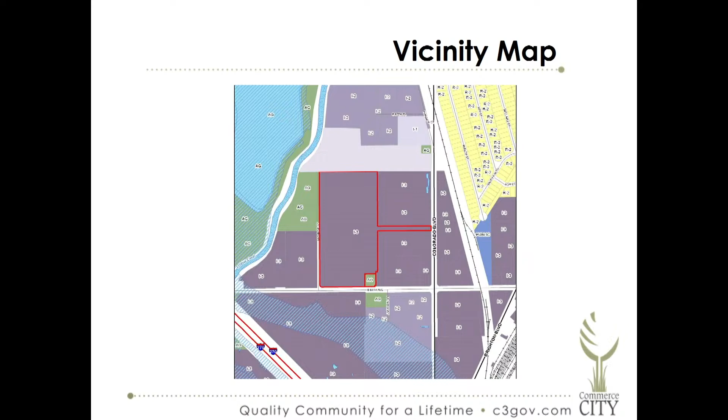So as stated, these are the requests. The current zoning is I3 with conditions and agricultural. The I3 with conditions on approximately 20 acres was zoned in 1991. The agricultural zoning on the .41 acres was from incorporation into the city. The proposed zoning for the entire property is I3. The future land use plan designates this area as general industrial.

These cases are being brought together because they are concurrent and dependent on each other, as we'll get into as we discuss the case. There is a concurrent development plan under review administratively that would need to follow these cases. The overall order is: the zone changes would have to be approved, then the consolidation plat would have to be approved, and only after that could the development plan be approved through the administrative review process. Only then would any improvements or site work be able to begin at the end of the full process.

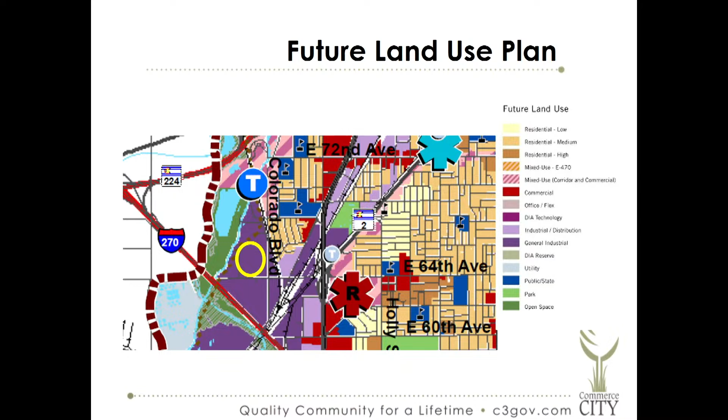This is a currently developed, or previously developed, site, as we'll get into with the conditions here. Those conditions would need to be removed for essentially any site or any use coming forward due to the nature of them.

This is a portion of the site that was a former landfill, and there are documents in the staff report that go into that in more detail. The applicant worked through an environmental assessment and discussion with Tri-County Health Department, and ultimately there were no objections to the rezone as presented. The environmental planner for the city of Commerce City reviewed all the documents and concurred with the ultimate assessment of the environmental issues.

The proposed overall use, under these cases tonight, would require rezoning all of this area, the subject parcel, to I3 and consolidating it into one lot, and that's the request before the commission tonight. Following that, there are 4 lease sites and on-site improvements. All of that is associated with the development plan, which would only be possible if those zone changes and the consolidation plat are approved, recommended for approval, and then ultimately approved by city council.

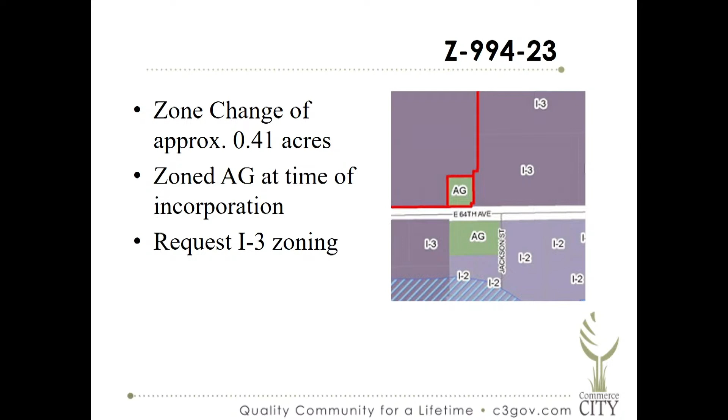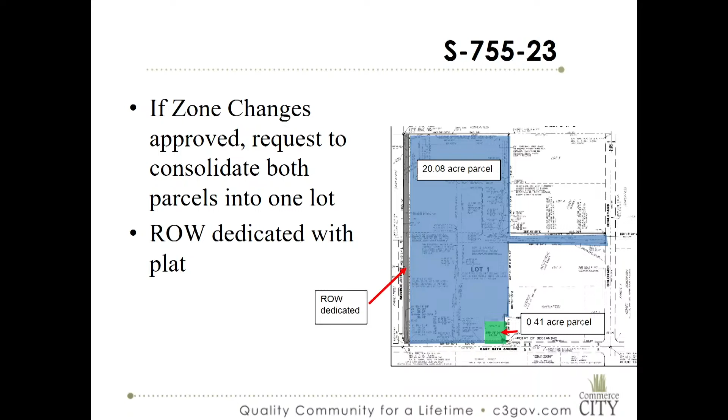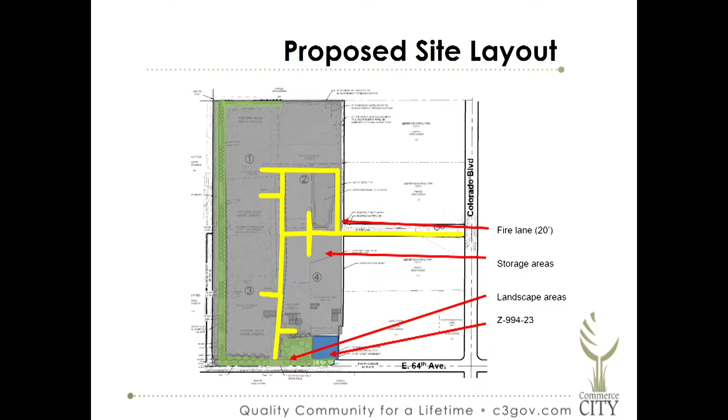The development review team analysis was that based on the request and the approval criteria, the rezoning and subdivision plats are justified, allowing development of a property in an industrial area. The proposed uses and concurrent applications are consistent with the request for I3 zoning. Ultimately, there were no agency review comments remaining or objections to the zone change or subdivision plat applications.

These are referencing the approval criteria for the zone changes in LDC section 2132.32.5, and for a consolidation plat in 2132.43.3. With these applications, DRT found that all of the approval criteria would be met.

At the March 2nd, 2023 DRT meeting, there was a recommendation to recommend approval to this body.

Staff did receive one phone call from a member of the public with some concerns and requested additional information. I believe they are here to speak tonight as well.

With that, staff will conclude our presentation. The applicant is present with a presentation as well.

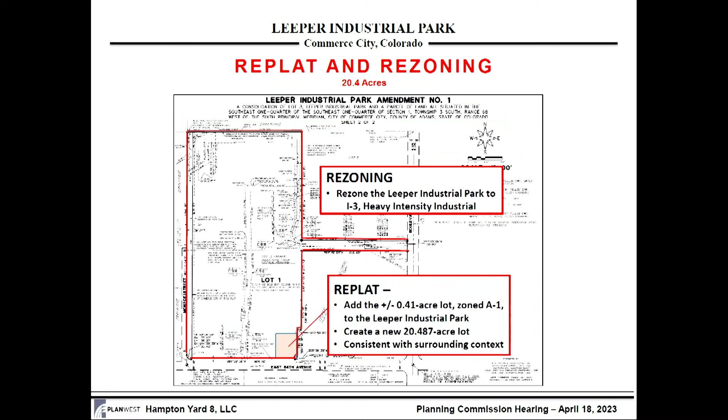I'm going to skip through this because Stacy talked about the rezoning and platting, I don't need to do that. Just to give you a little bit of background from when we started this.

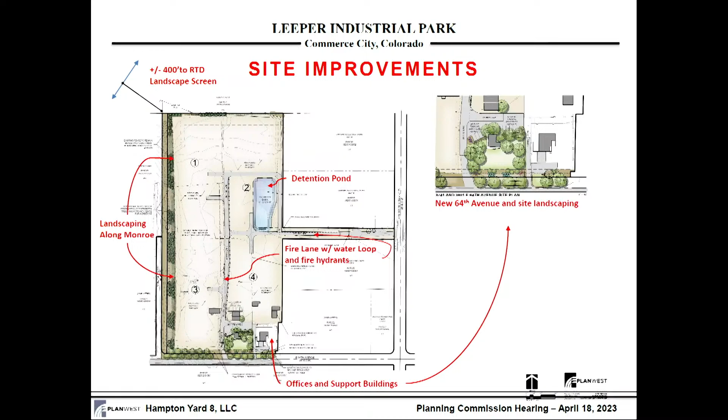So with that, I'm going to turn this over to Tucker, part of Hampton, and let them talk about who they are and what their intentions are.

Great. Thanks, David.

Hello, my name is Tucker Robinson, and I'm here representing Hampton Partners, the parent company to Hampton Yard 8 LLC. We've been in business for over 40 years and have experience in all types of real estate investment, but I wanted to highlight in particular another property in Commerce City that we purchased in September of 2020 off of 104th Avenue.

We repaved the parking lot for the office buildings. We put new roofs on all of the buildings on site. We even roofed the wash bay per EPA requirement. We added new landscaping to the frontage. We installed a new privacy fence — all sufficient to say that we care how our property looks, we care how our property operates, and we want to go above and beyond to be the shining example of what industrial property should be in Commerce City, that I think the movement has been towards in recent years.

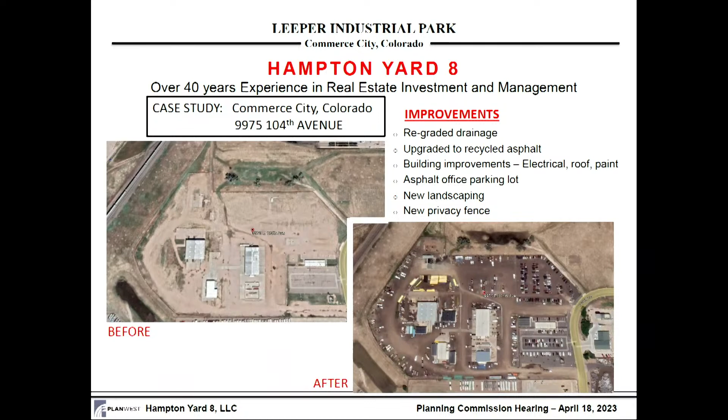So my name is Pat Pritchard. I'm with Hampton Partners, and I'm pretty much the PM on all of our projects, not only in Colorado, but also in other states we are presently in. When I worked on the 104th, it was quite an undertaking to bring that property up to code, but we have such great interaction with the city people in South Adams County that we actually accomplished that project in almost 16 months and had no problems. We upgraded everything, including electrical, plumbing, and the interceptor that Schlumberger obviously never put there.

I want everybody to feel reassured that this is the same task we're going to do at 64th. I've already taken the step and dealt with the state to put the 64th under the VCUP program. We're already starting methane monitoring and everything with the landfill. We're going to evaluate all the buildings to see if they need any monitoring. We're going to make sure that any vents needed for that landfill will be installed, and all the grading so that all the water coming off that property goes into our detention pond. So that's our goal, and we'd like to really move forward on this project.

Thank you. Thanks. Let's see here.

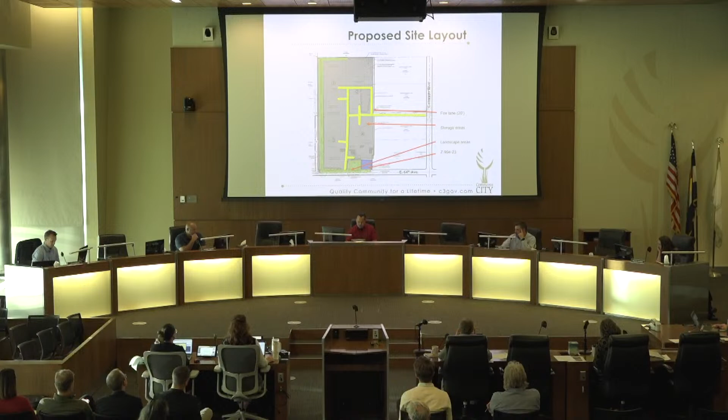With that being said, do we have any members of the public that wish to comment on this case? Yes, I would like to. Please approach the microphone, state your name and address.

Thank you. My name is Jeannie Nuanez King, and I reside at 6530 Colorado Boulevard. My family owns the property at 6641 Colorado Boulevard, so I'm pretty familiar with the whole area. Let me see if I can put this up a little bit.

Okay, first of all, I want to ask all the members here, have you been down to that area? Are you familiar? Have you physically walked the area and understand what is in there? Just asking, it's a fair question. I mean, it's nice to see the aerials and the pictures, and you did a lovely job. I'm excited about the landscaping.

But do you really know what that area looks like? Do you know what's down there? I'll speak for myself, yes, because of past communications when I was on city council and what that site could be and what it looked like. I don't completely remember everything, but for the most part I was kind of joking in my mind that everybody thinks it's in Denver, and it's not — it's in Commerce City. And the improvements that could happen would be good. So I'm interested to hear your commentary.

Okay, that sounds great. So originally, all that area used to be farms. There used to be orchards out there, but one by one all of those farms were sold. And what was returned was nothing but heavy, purple industrial, okay? I hope I don't get too emotional, but I'm watching what goes on over there, and I'm not happy.

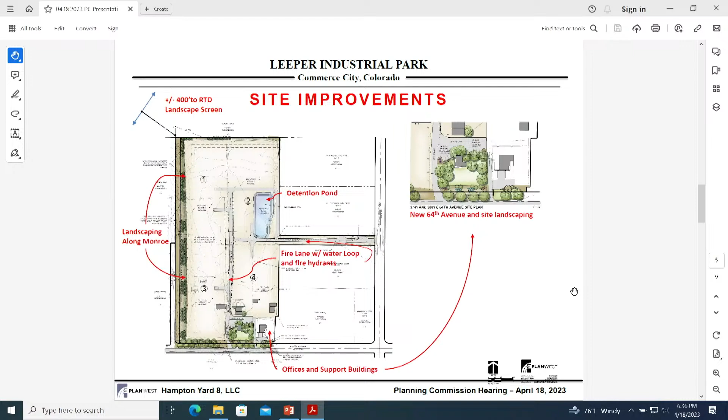There is a restriction for the city by code. I think it's 5% of the lot that you're supposed to have a building. These folks here, because of all the area over there that used to be landfill, that's not going to apply to them. They're going to use the little tiny buildings to fill that requirement. So basically, they're getting 20 acres without fulfilling that requirement that all the rest of anybody else who didn't have any kind of landfill would have to fulfill.

So, a building would make it look better. It really would. They're still going to be able to rent all the rest of that property out. They're getting the maximum use out of that property and turning an incredible profit because they're not going to have to build. What would the size of that building be if you could require them to build on that 20 acres? 10,000, 20,000 square feet, something like that? 40,000 square feet? They're not going to have to do that.

Jeannie, if you could please direct your comments to the chairman of the board. I'll direct the questions to staff. Oh, I'm so sorry, I didn't know that. I just thought I'd ask directly.

Okay, but I know that there's a requirement for that, and these folks are not going to have to do it because of the landfill issue. But they're still going to get the money for doing outdoor storage. So I'm just looking at this going, okay, I like what they're doing, the improvements and stuff. And like I said, they've been fairly decent neighbors. At least their property does look pretty cleaned up compared to the rest. But I'm not sure, I think a building would improve that site more. That's my two cents.

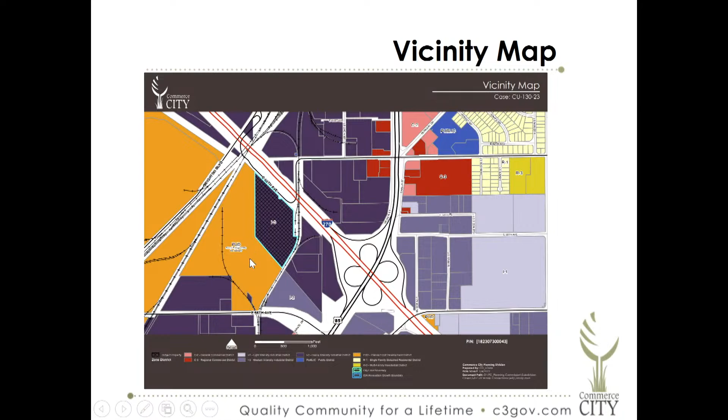The vicinity map shows the area located just south of 270. 60th Avenue runs across here as more of a frontage road. The site itself is located in an I3 zone district and is surrounded by greater purple uses that are also I3, but wanted to point out that the site directly across to the west and south is Suncor, located in a PUD.

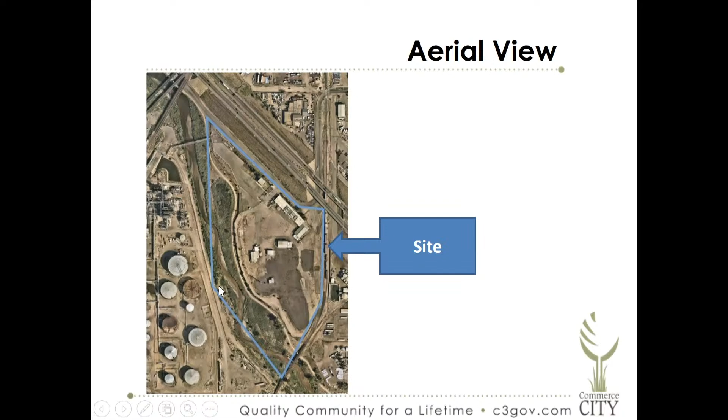So the aerial view, just so you can see something from the sky, the site is right here. It is bordered by the Sand Creek Trail over here. The applicant, in their plat, is dedicating an easement to the trail to our Parks Department. I just wanted to point out the topography, and as you can see, Suncor is off to that western, southwestern area.

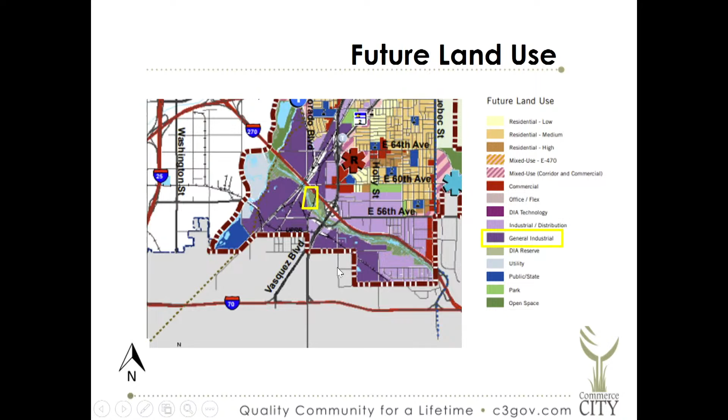So the future land use for the site is general industrial. It is surrounded by general industrial, like-minded businesses. There is a very generous swath of open space that denotes the trail itself, and that's where that's coming from with the comprehensive plan.

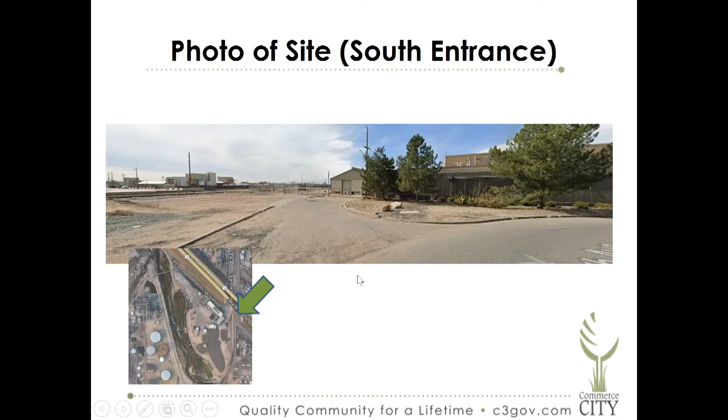And the fact that there is no sidewalk along this area. So with the conditional use permit, the applicant in their operations plan, noted in Exhibit 4 of your packet, proposes to have up to 90 employees on the site, to continuously have the site manned with personnel. They'll be trained to ensure best practices at the facility, and they will also be inspecting the site daily around the right-of-way and around the Sand Creek Trail itself.

The material will be screened. It all comes inside the building, and they will ensure that it's acceptable at the facility. Otherwise, they will ask for it to leave. There will be 110 parking spaces provided for not only the employees, but for a few guests that stop over.

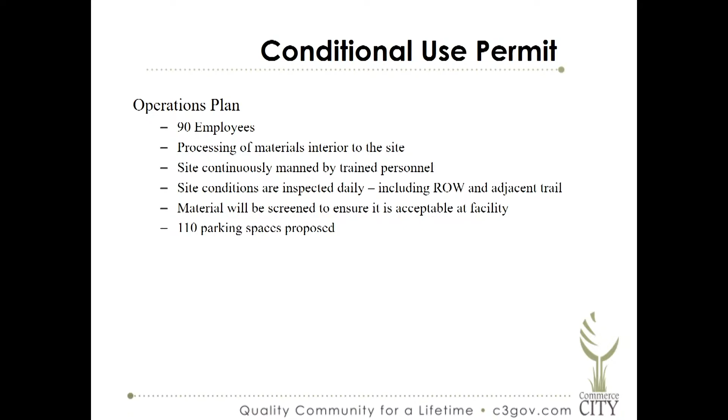So with our sustainability analysis, I wanted to point out in Chapter 15 of the comprehensive plan that Waste Connections is really trying to work through the environmental conservation and stewardship goals of this chapter by supporting waste reduction and diversion, partnering to reduce waste in the city, and to repurpose a former brownfield site for a less intense industrial use that actually supports sustainability within the city.

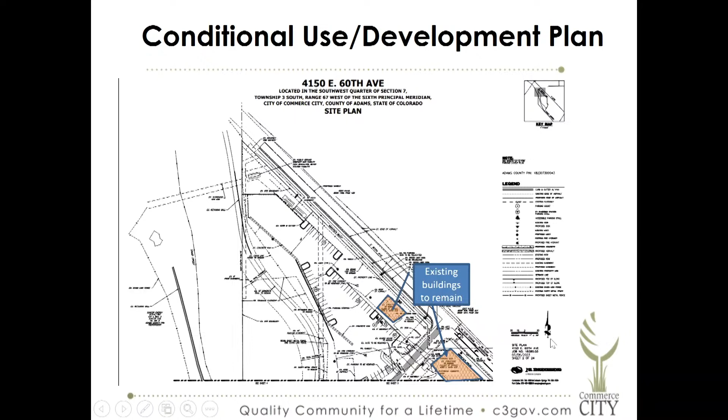So with their conditional use, they also have a development plan that's proposed, and I wanted to point out a few features. It spans a few pages, my apologies. There are some existing buildings that they are keeping that will remain, as I noted, for offices and for storage. These are a couple of those buildings at the northern entrance, and these are a couple of the other orange buildings that will remain. I believe this is for office and this might be for storage.

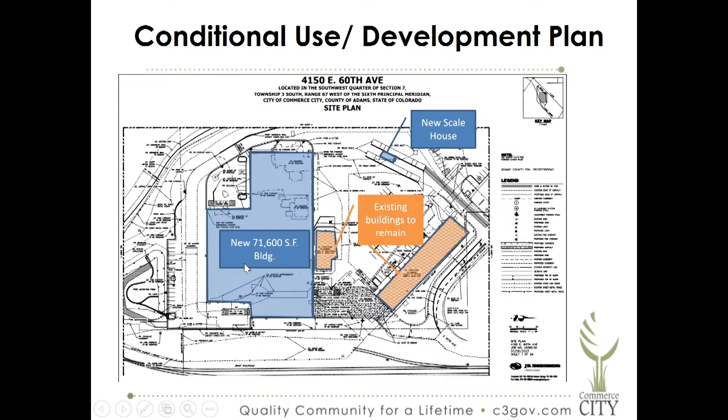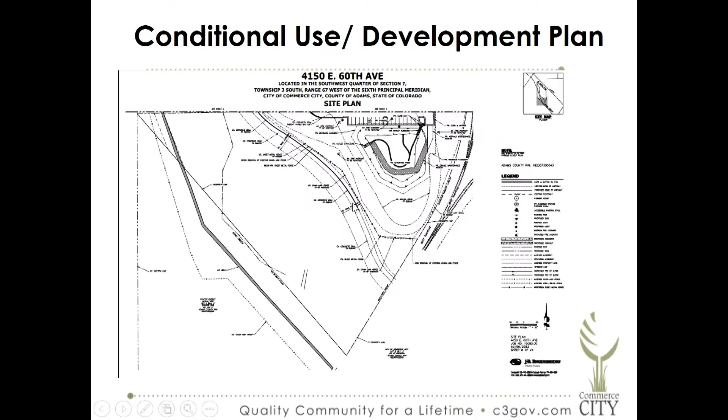They are proposing 2 new buildings. One is a scale house that will intake the waste and/or the recycling operations and outtake it. And then this is the state-of-the-art 71,600 square foot building where all of the operations will occur interior to the site. And these are just some other highlighted buildings showing the northern part of the site. I'll go into a little bit the detention pond in a subsequent slide.

So with the development application, a landscape plan is proposed. The existing site does have some existing trees, but not nearly as much as the applicant is proposing. As you can see in the green, these are the landscaped areas, primarily landscape buffers in the form of a landscape buffer that surrounds the site and enhances 60th and their parking area. I also wanted to highlight that they are proposing a 5-foot attached sidewalk along 60th, shaded in the blue. And then this is the existing Sand Creek Trail.

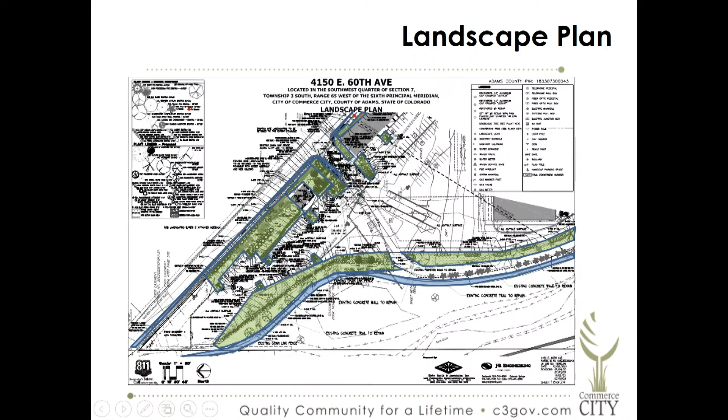You can see that their property does span the trail, but they are dedicating it to us. This is the other sheet of the landscape plan, just to depict the detention pond, additional trail corridor, and that northern area of 60th, my apologies.

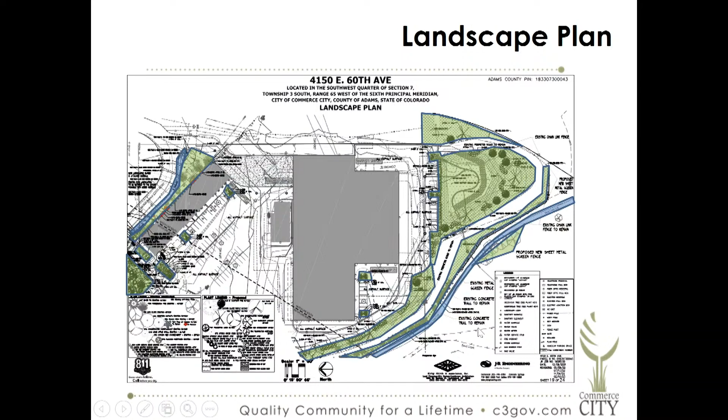So their building elevations: the materials recovery facility is comprised of a CMU wainscot, brick cladding, which is that darker brown that you see on your sheet, and corrugated metal building panels. The roof is a standing seam metal roof, and the color palette is comprised of varying shades of grays and browns.

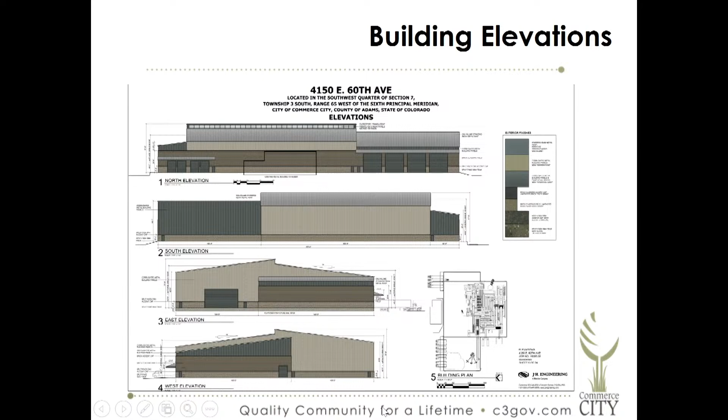So with our development review team analysis, they found that there were no issues or concerns, that the request is in line with the comprehensive plan and our sustainability action plan, which is new. The goals for waste diversion, adaptive reuse, and repurposing of a brownfield site, and that Waste Connections itself is really expanding economic opportunities within the city with well-paid positions, and the addition to make us a more sustainable industry within Commerce City.

These 3 conditions of approval are recommended primarily to provide adequate assurances of continuing maintenance for the fire department, the health department, and the city. And these were requested, and they're in line with item 5 of the conditional use permit criteria. Staff and the applicant find these acceptable.

So the development review team reviewed this case in a meeting on April 6th and made an official recommendation of approval for the case.

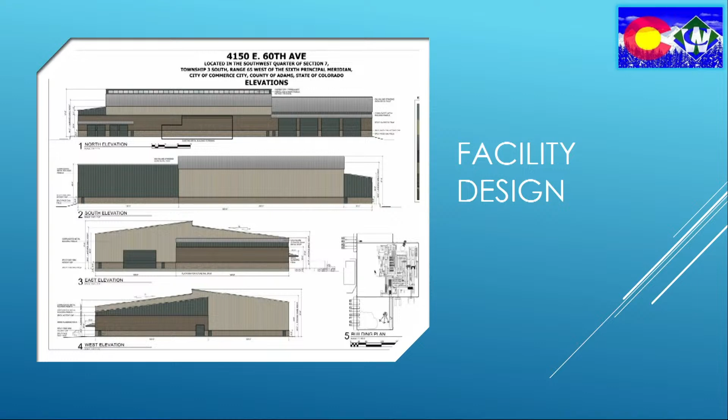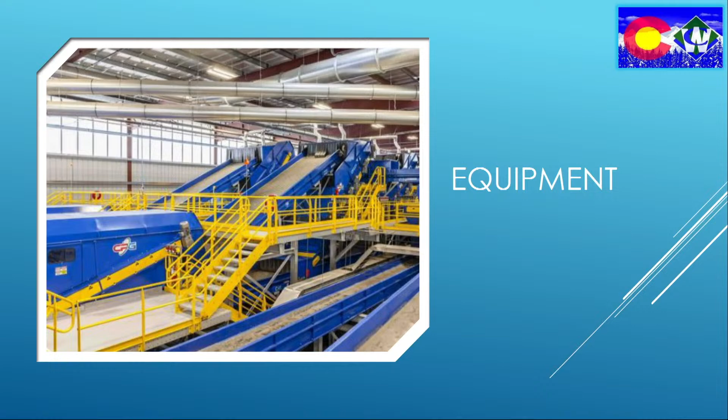I want to talk about a few of the operations highlights with what we believe are very reasonable hours. But really the most important thing when it comes to this is that it is so important and imperative to us, as our number one value is safety, that our people and leadership are properly trained in the waste characterization of these materials to ensure we are recognizing unacceptable materials and getting them to where they need to go, which is not the recycling facility.

We think it's really important because we understand that comprehensive plans are a guiding document for the city, but it's also really important to us to make sure that we're in line with what the city wants to do. That's extremely important to us.

I know that Libby laid those out before, but EC 5, EC 5.1, EC 5.2 that you brought up, Libby, those are extremely important, and we recognize those as well. But also the vision and goals, which is to become a green city where viable. This is that opportunity, this is that chance to be that green city.

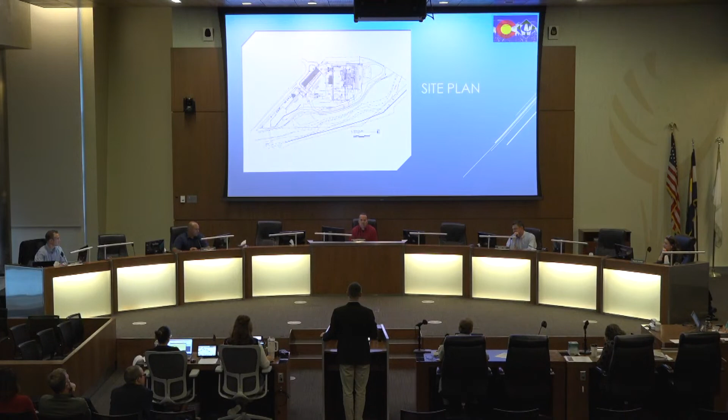So I'll start at the beginning there, and please, Art, correct me if I need it. I know exactly what bridge you're talking about. So if you look into the facility here, they're not coming in and out of the same entrance. They're coming in the main entrance, going into the building, and going back out the east side.

So all of the traffic would be off of 60th Avenue at the red light camera intersection? And that's where the traffic study was conducted, where we showed minimal impact. And you said how many trucks a day? 85 of the recycle trucks, but 452 vehicles overall. So the rest would be passenger vehicles.

So on top of the additional vehicles that pass through that intersection every day, I think about semi-trucks who get out of first gear, and we know this from 104th, get out of second gear, and by the time they're in the intersection, the light is red around that 60th Avenue. We see it all the time, and we've heard it multiple times around trains and in the community of folks being able to access or get through an intersection. So I think, has that been part of the traffic study? Or are we just saying the number is the number, and now we're stuck with 20 trucks trying to make a left turn at 7 o'clock in the morning when there's major high volumes of traffic?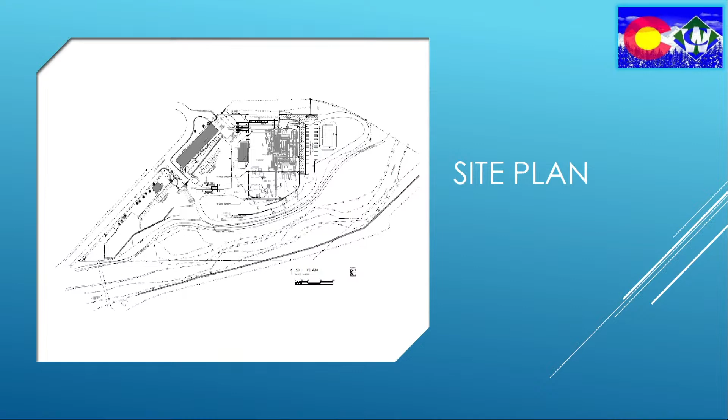Okay, I'm actually going to go to another slide we have, just bear with me. So yes, we did look at the 60th Avenue and Vasquez intersection, and we did show with an opening day condition that there would be minimal delay, an addition to delay of less than 2%, which is within Adams County criteria. But CDOT is planning to do improvements at that intersection starting in 2024, which will help to alleviate traffic in general at that intersection.

So with the improvements of CDOT, does this traffic study only take into consideration today's conditions, not the future improvements, or what does that look like? We did look at today's condition, and we did look at the future improvements. And obviously the future improvements address a lot of the traffic issues, both in the background condition and with the project. But the project alone just adds minimal delay to the intersection.

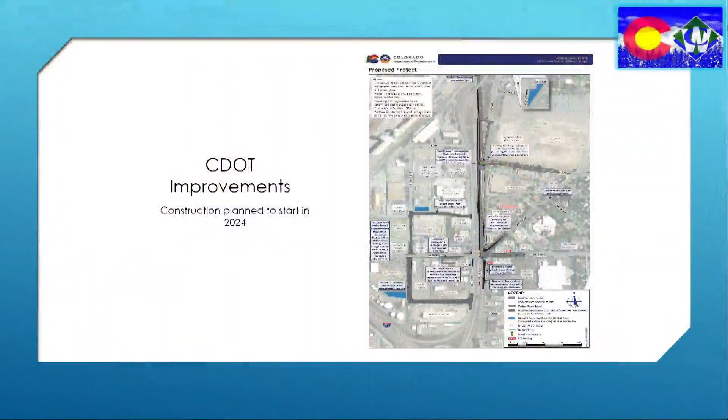It's under 2% delay. So I know this isn't part of the case, but with the CDOT improvements, I drive this intersection every day, and there is always a backup in the right lane getting onto 270 all the way past the intersection we're talking about, the red light cameras, if that makes sense. And so as I think about where additional traffic comes from in the form of big trucks, we are saying that there's, I'm going to call it a nominal impact to traffic at this point with the approval of this conditional use permit?

Correct. Okay. Thank you for that.

Okay, so another question for the applicant related to some of the things that was said in the presentation around being the best stewards of the property as possible, and really related to conditions that we see before us in this conditional use permit. So we have a condition of fire mitigation and emergency preparedness plans as condition A. We have condition B of copies of applicable state and federal regulatory agency permits, which shall be inspected and provided to the planning division prior to commencement, keyword prior to commencement of operations. Item 3, methane detection, pretty straightforward and I think pretty standard.